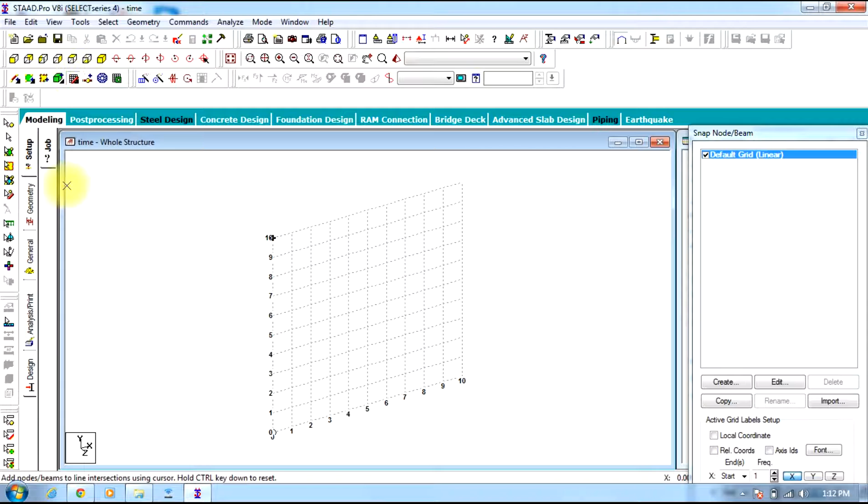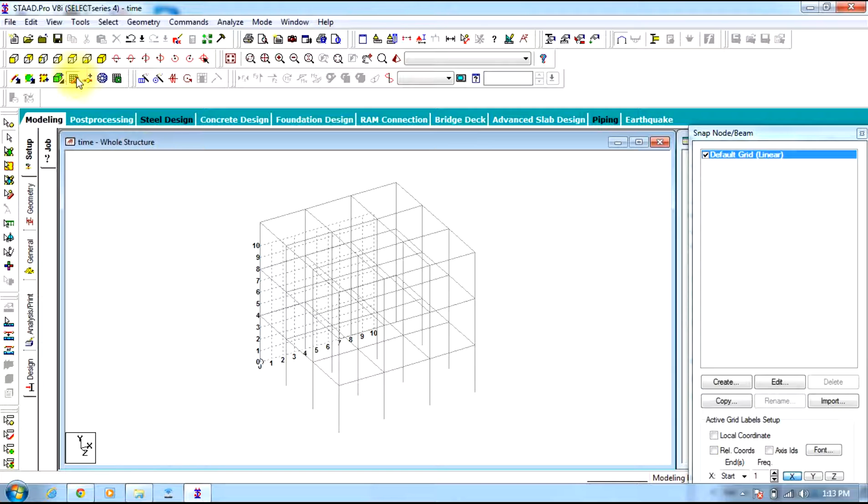Initially we will start STAAD.Pro and select space frame. Then go to Geometry, Run Structural Wizard. Select frame model, select Bay frame, select structure, create a structure, then transfer the structure to the main STAAD.Pro screen. Now you can switch off the grid. Here you can see our structure.

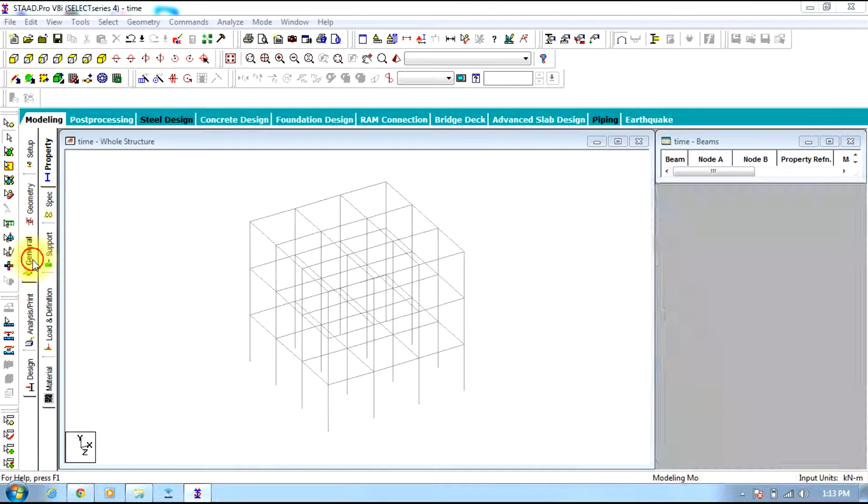We'll be carrying out the time history analysis for this structure. So let us begin. First we will go to General and define a property for the members. Let it be rectangle 0.4 by 0.3, assigned to the entire structure. Then going to supports, create a pinned support.

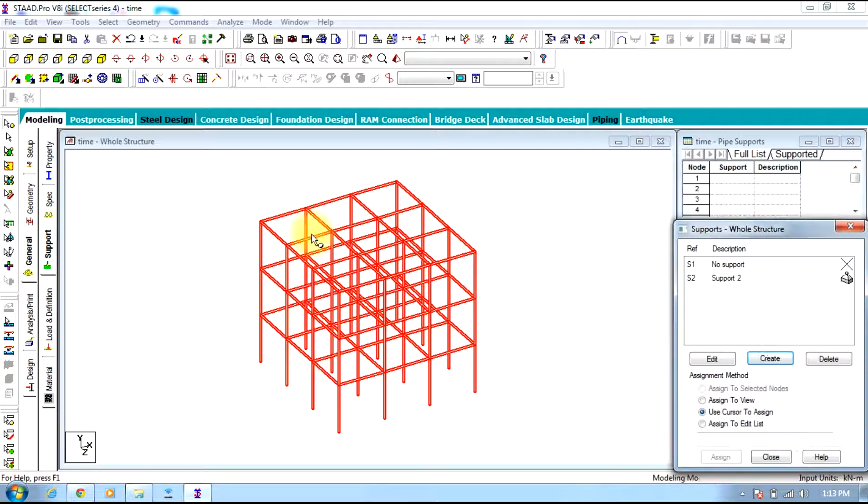Now, the basic information we require for time history analysis is that it is nothing but analysis of a structure over increments of time as a function of acceleration, or maybe force, or moment, or displacement. It is just the analysis of time versus acceleration, time versus force, time versus moment, or time versus displacement.

Or else, it is simply the response of a structure evaluated as a function of time, in simple words.

So in order to begin time history analysis, we have two steps. First is defining the time history analysis definition, then assigning it to the building.

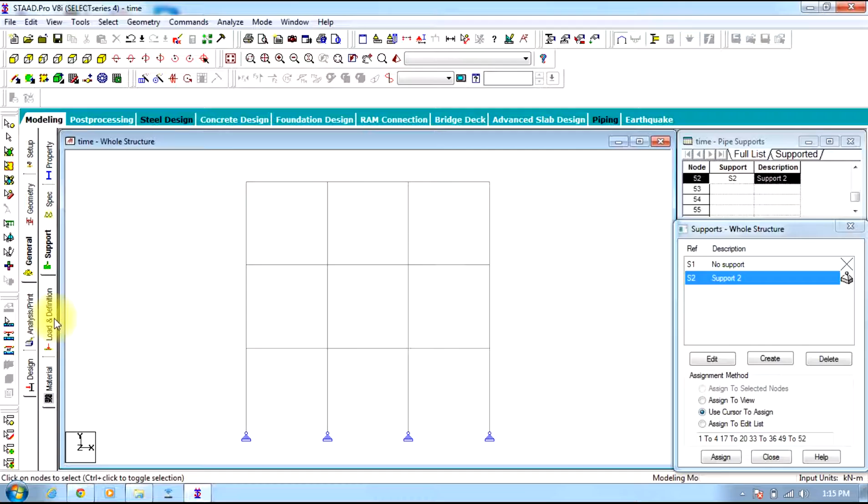Second step will be... So first we will go to Select Loads and Definitions, select Definitions, double click, and select Time History Definition, select Add. A dialog box opens. First let it be type 1.

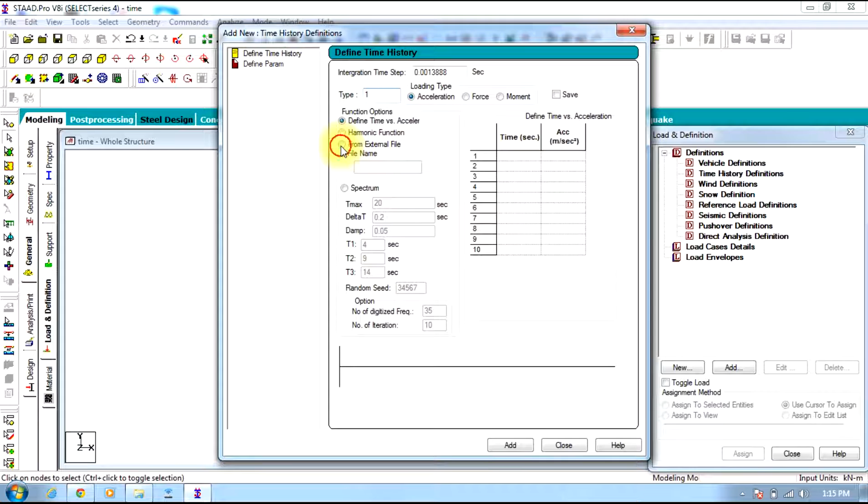Type 1 is simply the starting one, and the loading type let it be acceleration. You can also keep force and moment. Coming to function options, if you have time and acceleration you can provide it, or you can save it from an external file. This external file should be saved in the same directory where this STAAD file is stored.

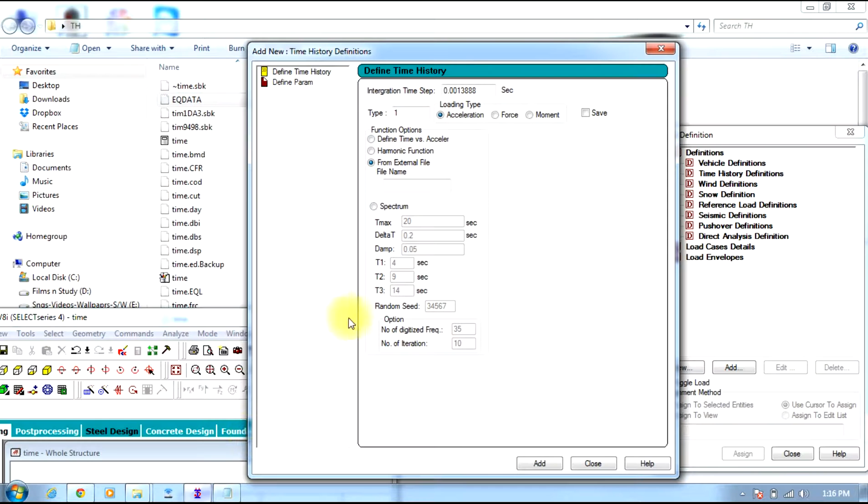So as for me, the time STAAD.Pro file is stored in this folder, and also the external file - you can see it consists of data for time and acceleration. It is also stored in the same folder. It is eqdata.txt. We will just note it down here: eqdata.txt.

Now you select this Save button. Now select Add, then go to Define Param.

Time step, in simple words, is the time increment used for analysis, and arrival time is the time at which the assignment of load begins. It can be positive, negative, or 0, and it begins at time 0 by default.

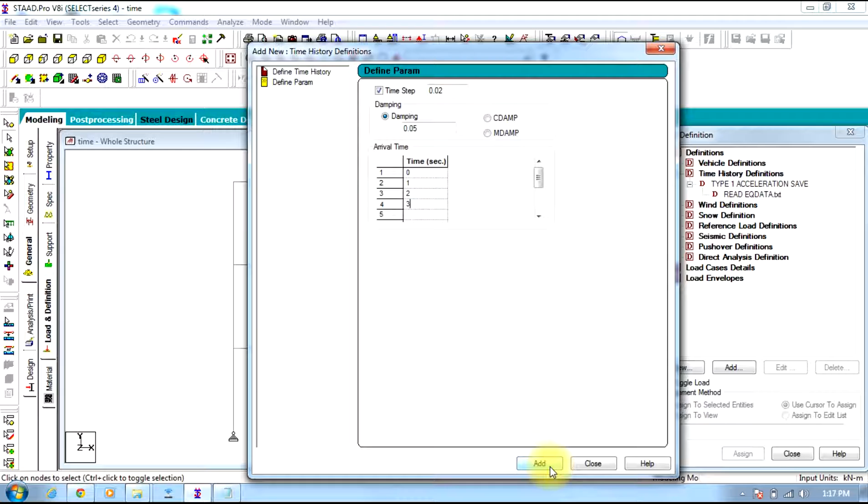So we'll give time step as 0.02, meaning the time history analysis will be in increments of 0.02 seconds, and arrival time for 0, 1, 2 and 3 seconds is given, at where the load assignment begins. Select Add. Now close it. So we have done with the first step of defining the time history definition.

Next, going to load case details. First select dead load, select self weight - loading type will be dead. Second one will be dead load, floor load or slab load - loading type will be dead. Third one will be dynamic load, and loading type will be seismic.

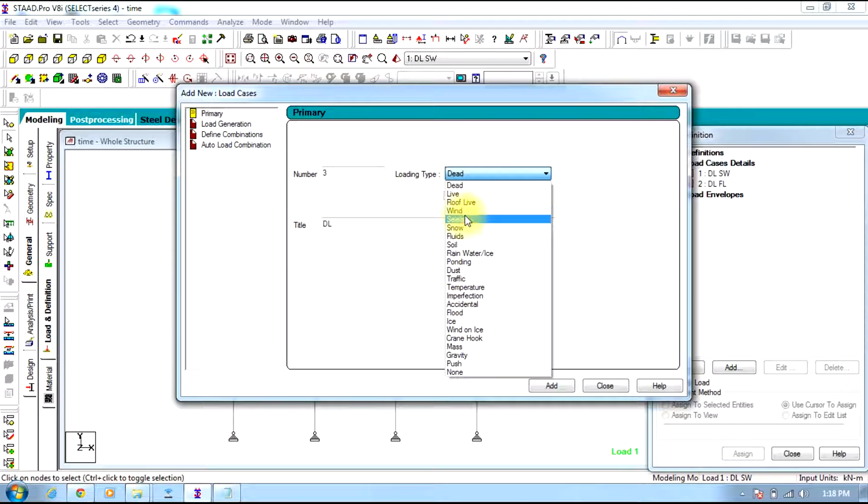Select Add. Now going to dead load self weight, select Add, give self weight in the Y direction. Select self weight, assign it to the view, meaning the whole structure.

Next, going to dead load floor weight, select Add, give floor load which will be minus 12 kN per meter square in the range of 0 to 12 meters in the Y direction. Select Add, and you can see it.

Then going to dynamic load, just to avoid confusion, you can note it down.

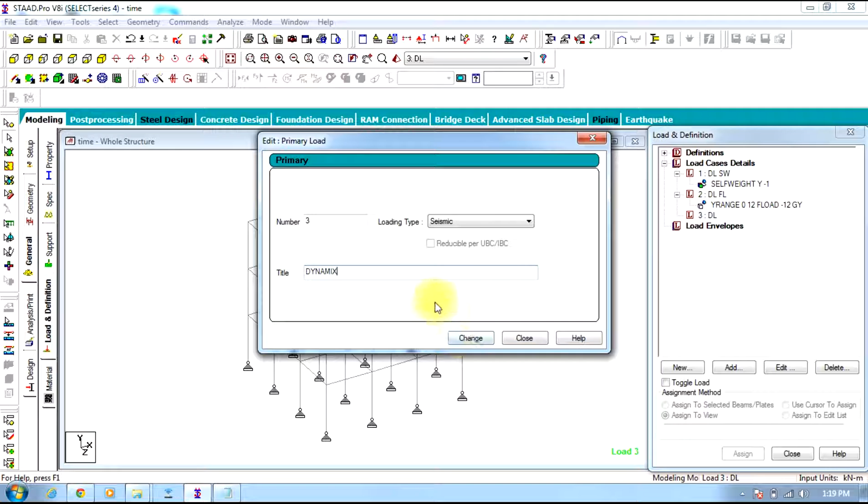Now select dynamic load, select Add. First we will be giving self weight in all three directions, and it should be +1. Factor should be +1, and the load should be the same in all three directions.

We have also provided floor load of 12 kN per meter square in the range of 0 to 12 meters in all three directions: global X direction, global Y direction, and global Z direction.

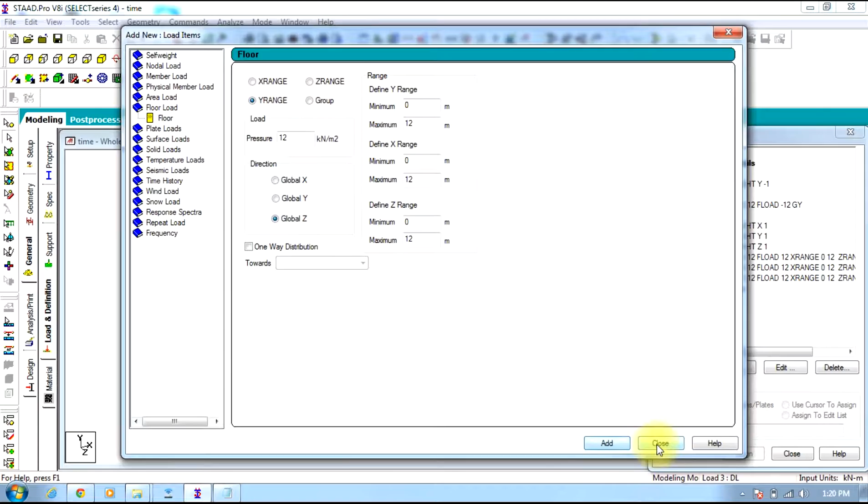Now assign the self weight to the view or the building. Now you can see the load being assigned.

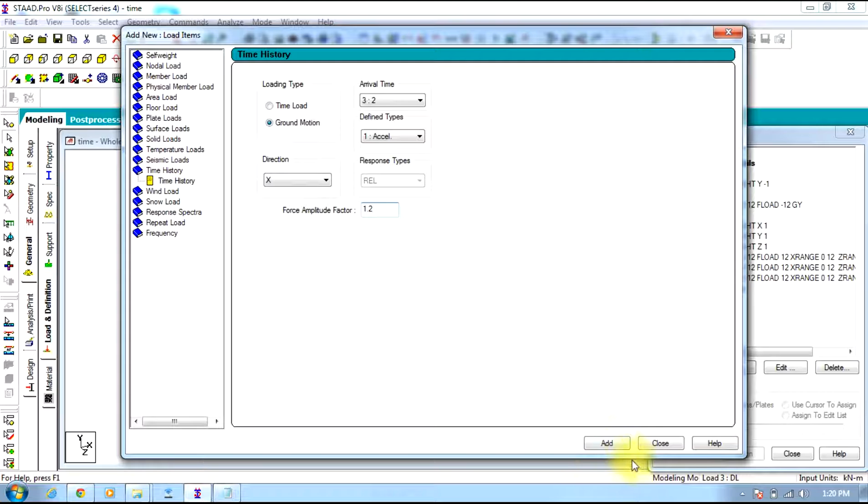So now select dynamic, select Add, go to Time History Load, select Ground Motion. You will select arrival time as 2 seconds. Defined type will be acceleration, and direction is given as X. Amplitude factor you can keep as 1.2 or 1.5, or else you can give 2. Select Add, close.

Now you have done with the second step of defining the time history to the building - assigning time history loads to the building.

Now you go to Analysis and Print, select mode shapes or no print. Select.

The one thing you need to do before all this is provide mode shapes by going to Commands, Miscellaneous, Cut Off Mode Shape, keeping to default 6, but we'd like to have 25 or 30 mode shapes. Select OK.

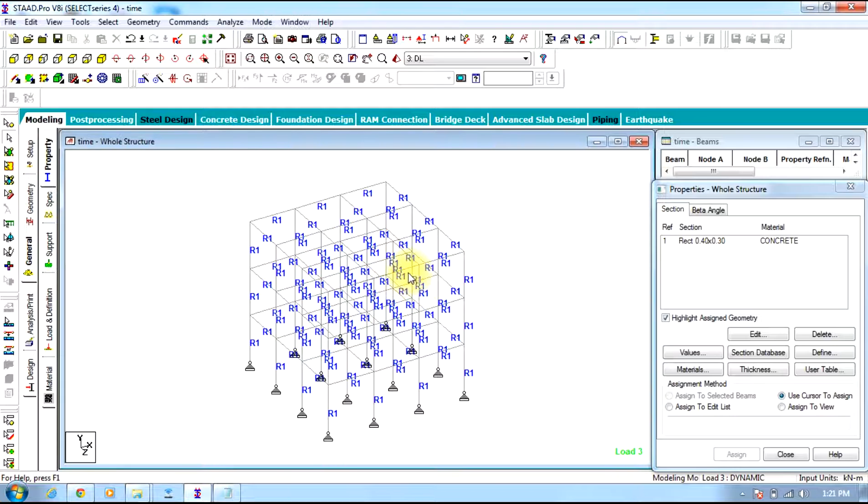Now we can go to Analysis, select mode shapes, select Add.

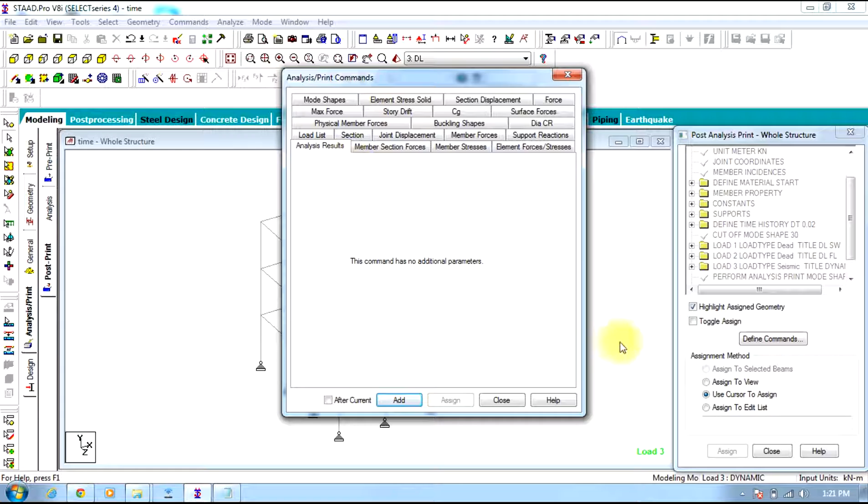Now going to Post Print, you will define command Analysis and Results. That would be sufficient. You can even add mode shapes. Now analyze the structure.

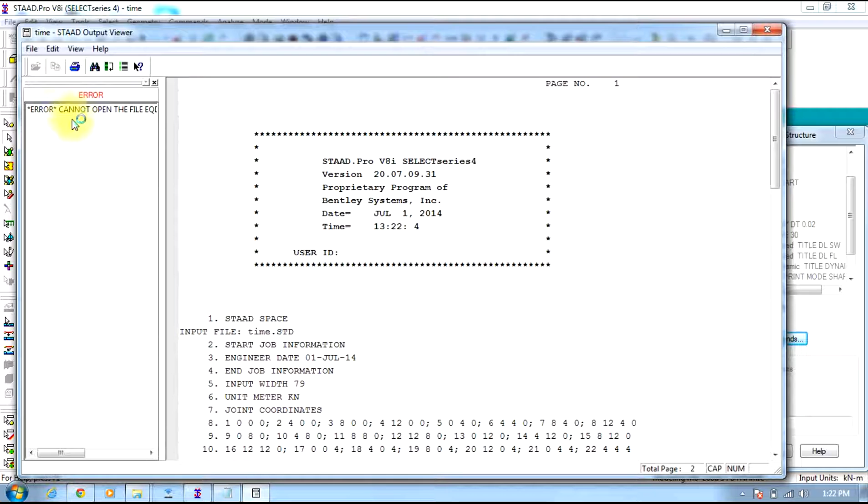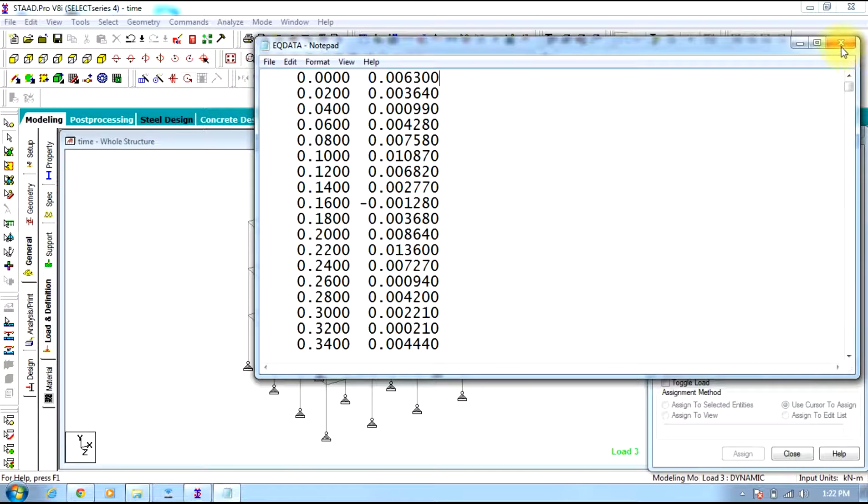So you can see I have made a simple mistake. I need to take care of all those. Yeah, this was open, so just close it. Now run the analysis and let us see if it works.

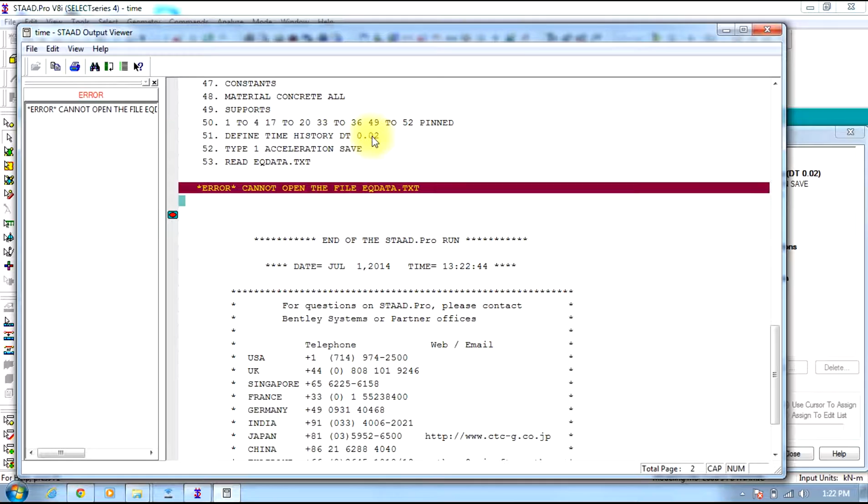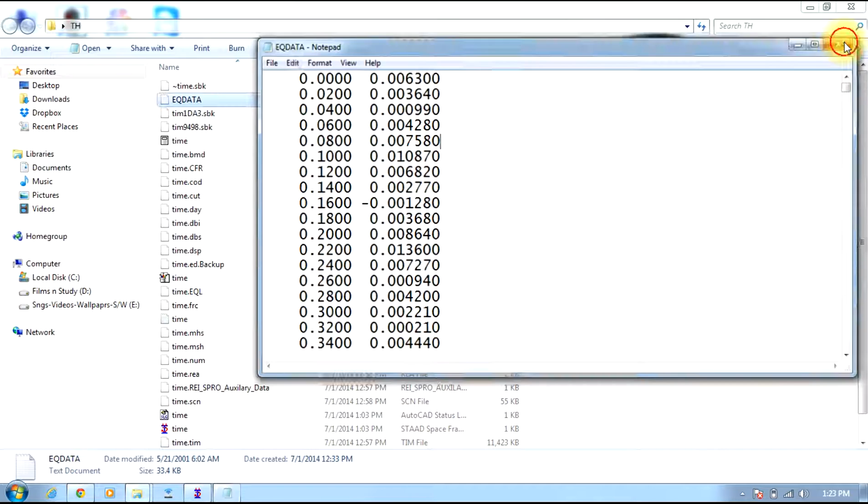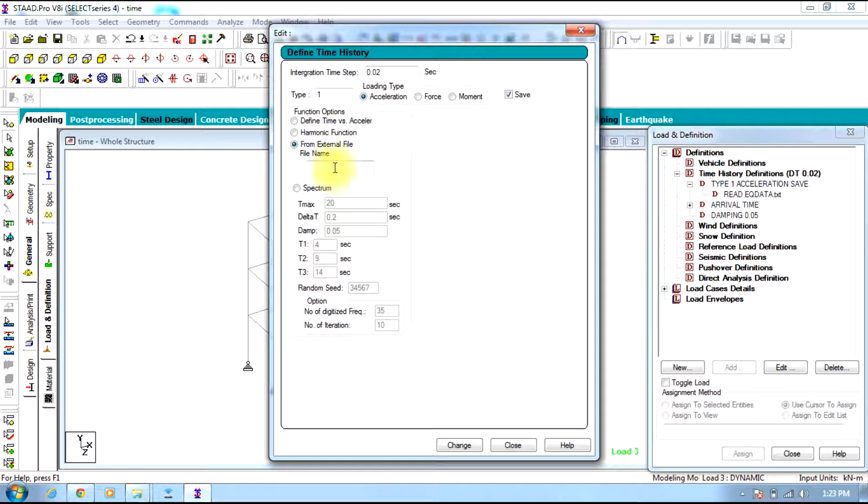Well, everything is fine. Then where is the mistake occurring? Okay, so this might not be it. Actually, this should be it.

Let us open that file and see what it contains. Actually, it is another file.

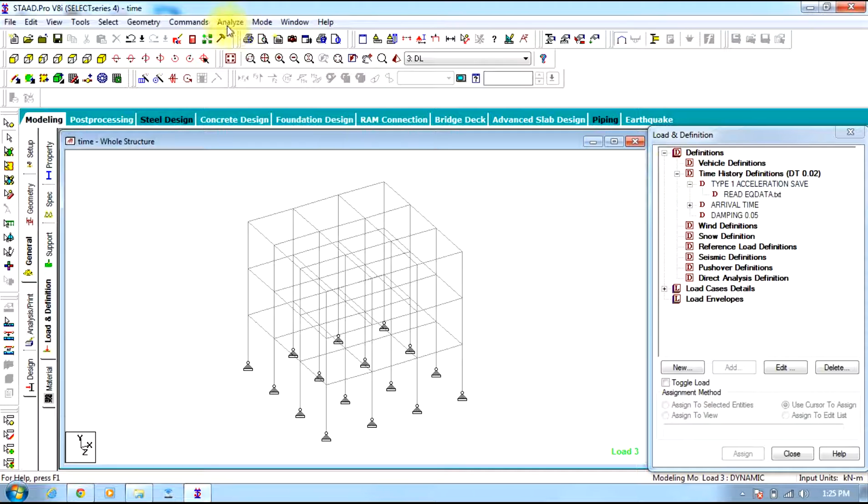So we'll copy this file and go to the folder where the STAAD.Pro files are located or present, and paste it here. Now run the analysis and see if it runs or not. Yes, it runs. Actually, the file was in that folder but not in this one. So you need to take care of that to avoid miscalculations and errors.

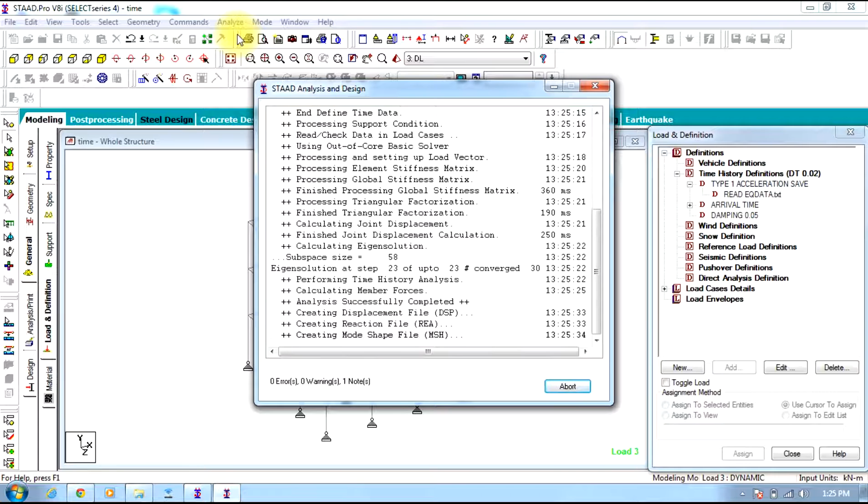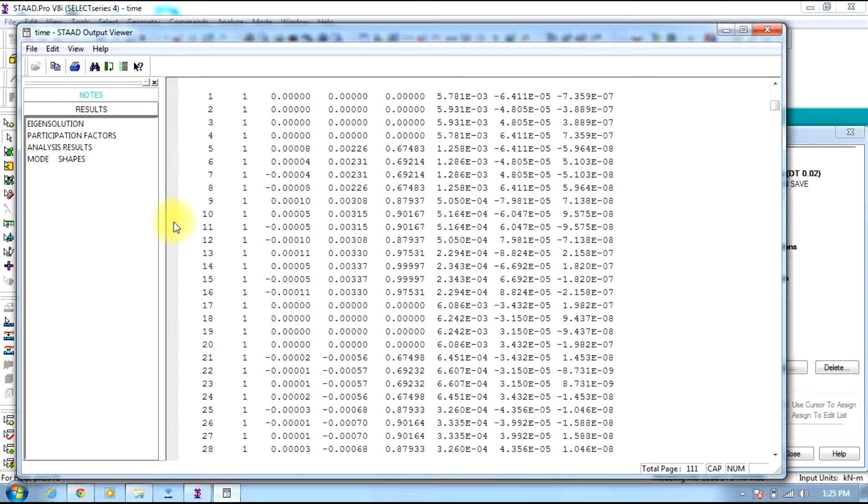Well, you can see the mode shapes are also provided. Coming to participation factors, easily 90% is achieved in the first few mode shapes.

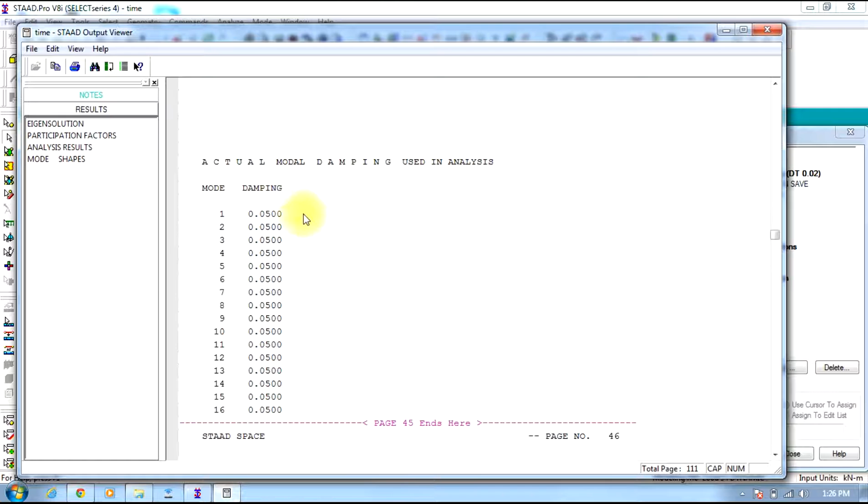You can see modal damping used in analysis is 0.05. Coming to here, time step used in history analysis is, as we took, 0.02 seconds, and the number of modes considered is 30. Time duration was 34.16 seconds, and the number of time steps were 1708. So you can see maximum base shear in x direction, y direction, and z direction occurs at the time provided.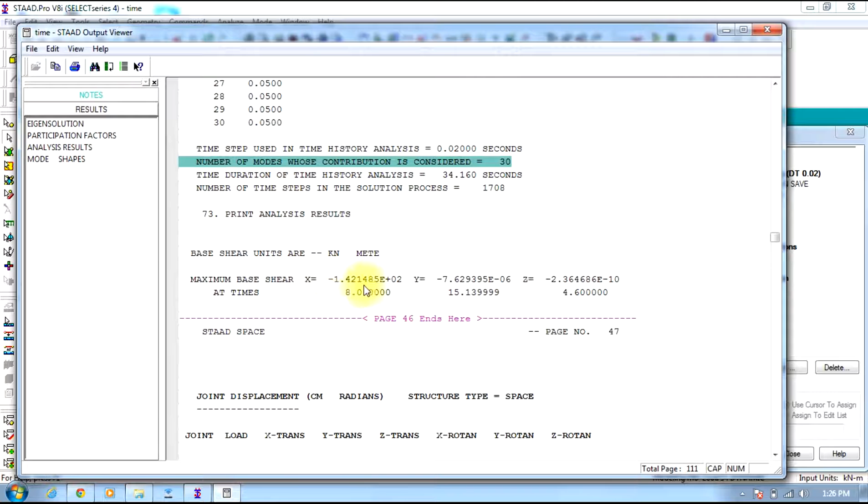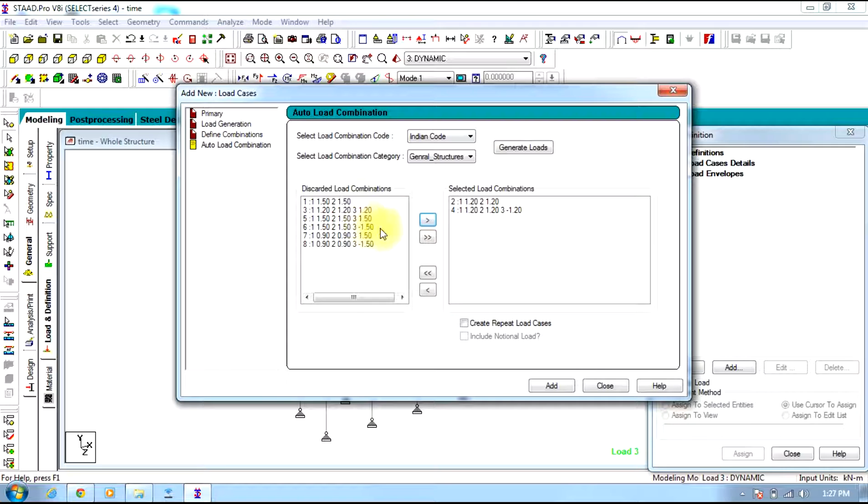Well, in this way we observe the results. Now going to post processing. Okay, do one thing: create a few combinations. That would suffice. Select add.

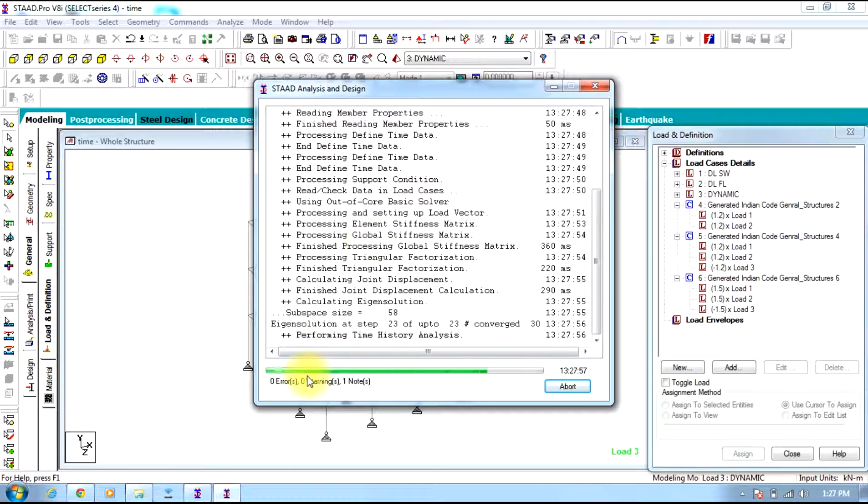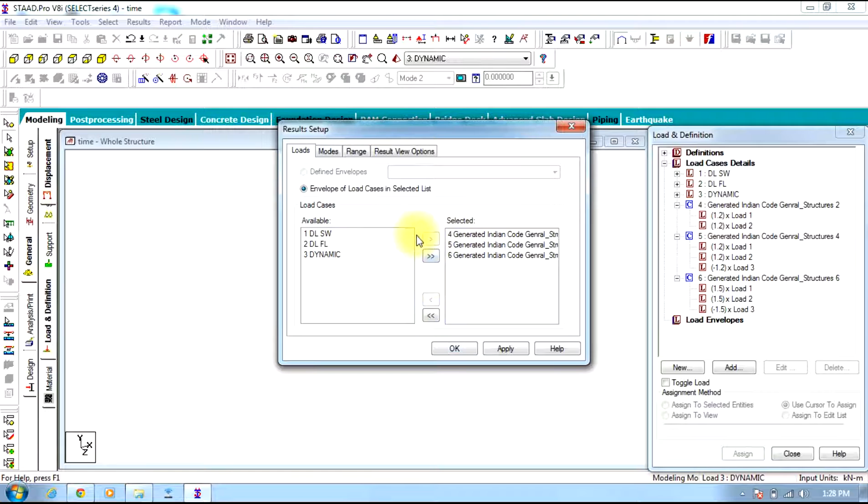Now analyze the structure once again. As you have observed the output file, we will go to post processing directly. In post processing, we'll consider the three combinations, removing the nodes and loads. Only the three combinations selected will be considered. Select OK.

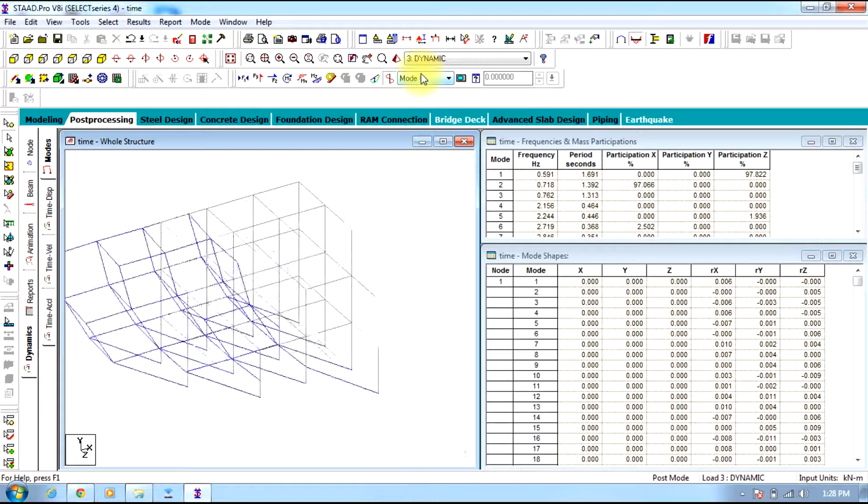Now going to dynamics, you can see the modes and the different mode shapes occurring for different types of modes. Their particular details are given here.

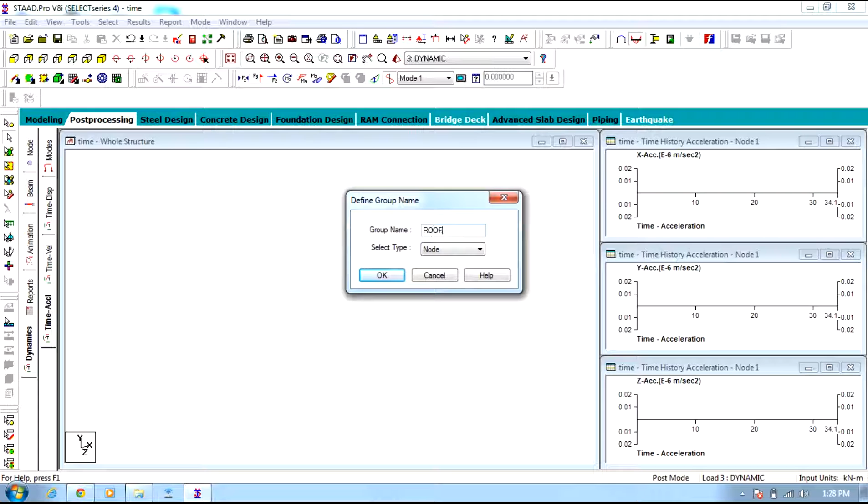Then going to the time acceleration tab, it asks you to create a node group. Select yes, and select the node group as roof. We will be considering roof nodes. Select OK.

Now select the nodes. Select the roof nodes carefully. Or else you can select front view and select the roof nodes easily.

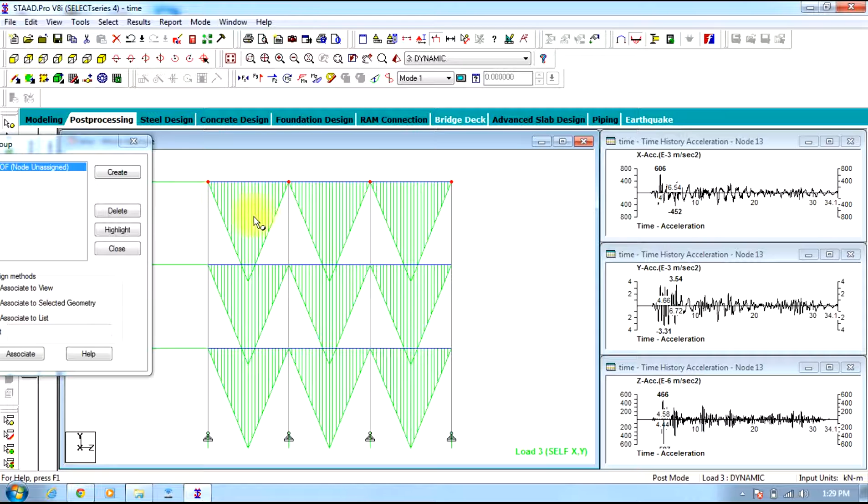Then going to other view, so all the nodes are selected. Now select associate. Okay, now you have selected. Now close it. Well, now select the particular node. You can select even other nodes and it gets created.

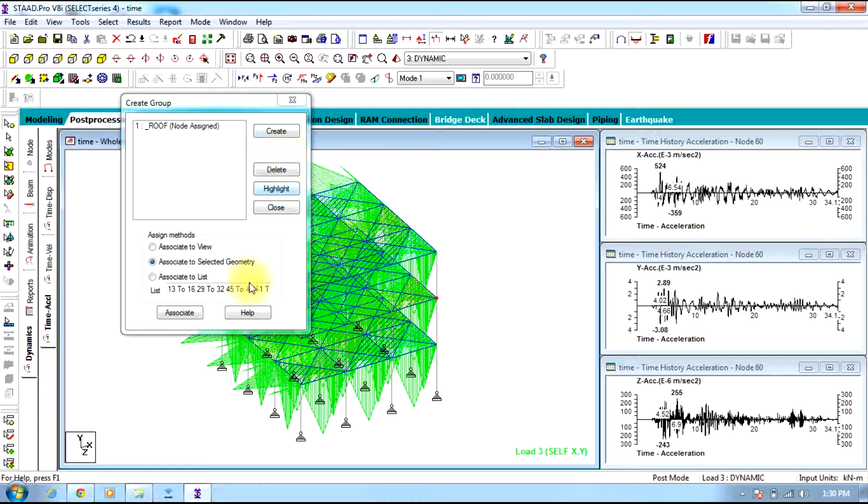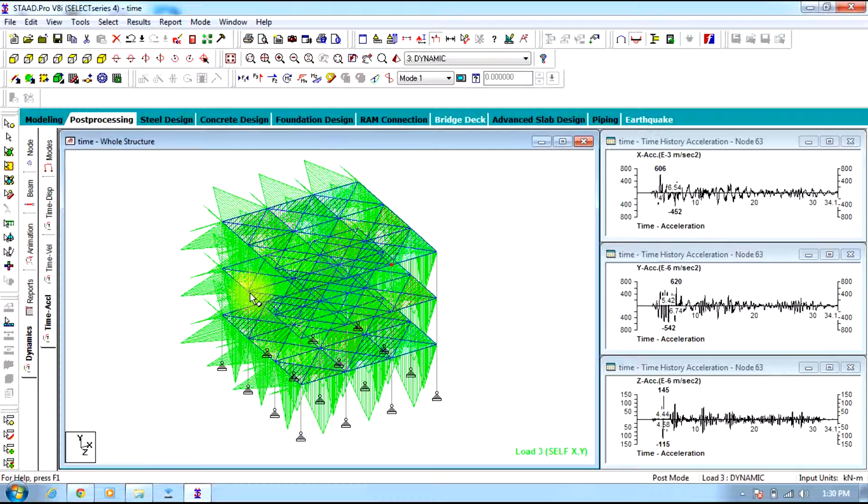So as you can see, this is node 56, and the graph is shown for acceleration versus time. You can see this here for node 64, node 63, and node 25.

Now going to time displacement, you can select the node and observe the time displacements. Well, you select the deflections.

Well, you cannot view it since the scale would be very small, so you just go to results, select scale, and decrease the scale.

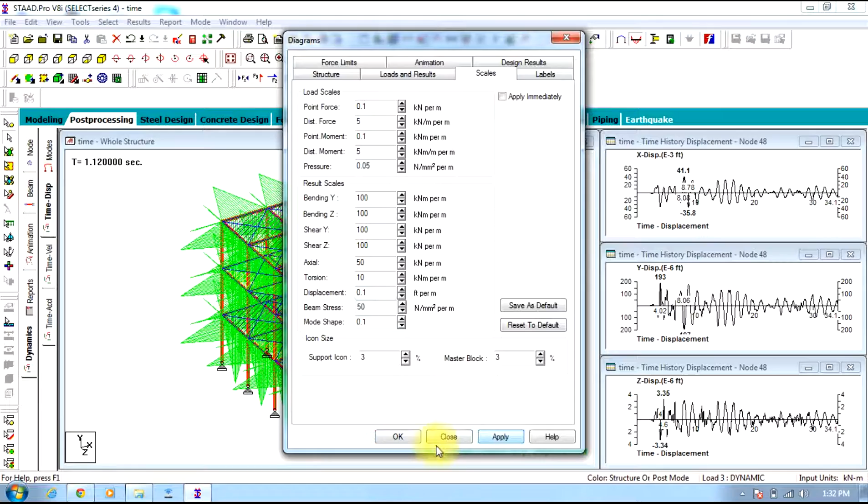Select the structure, go to scales, decrease the scale, select apply. Okay, well, here it is a little difficult, however.

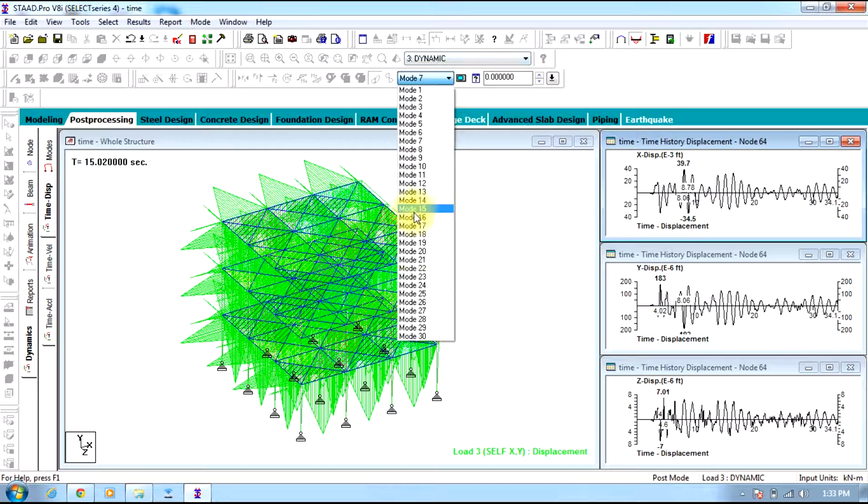For that particular node you selected, you can see the deflection at different times, and for different load combinations too. For different modes also, as you can see here, the deflection occurring.

Let us see by going to results, selecting scale, decreasing it, if anything happens. So you can see for mode 28, however, the deflection can be observed in that way.

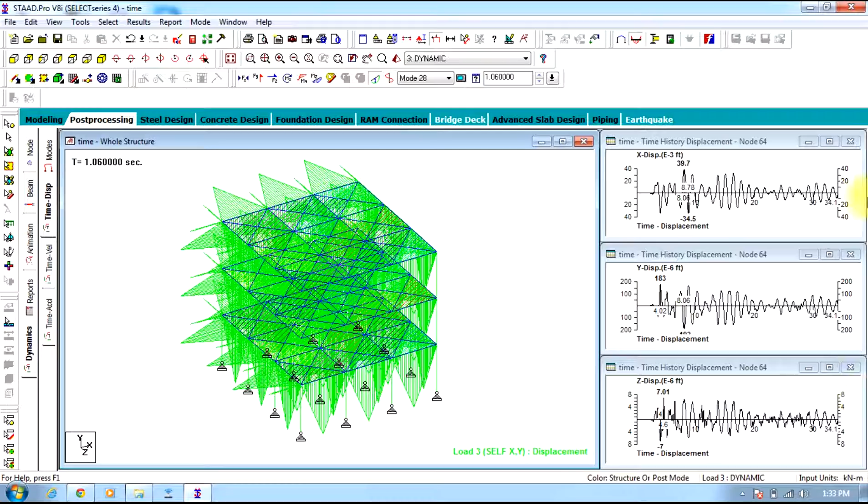So in this way the time history analysis is carried out for a structure, and this would be the end of the session.

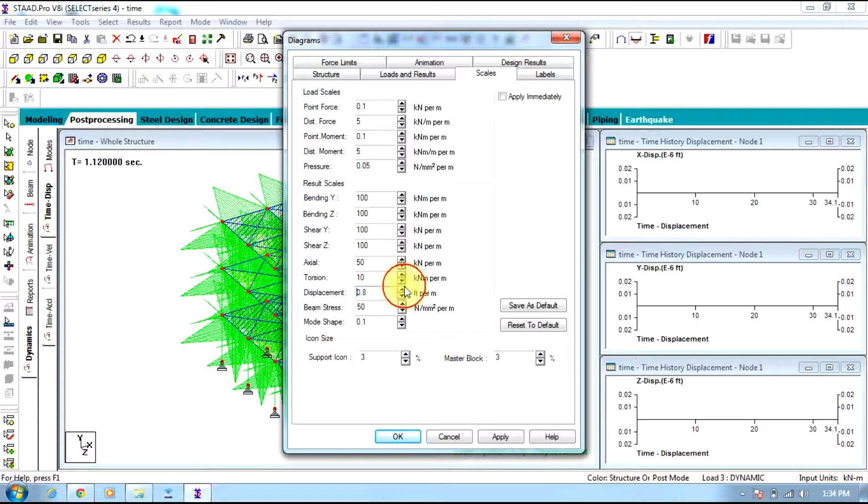However, just a second, hang on.

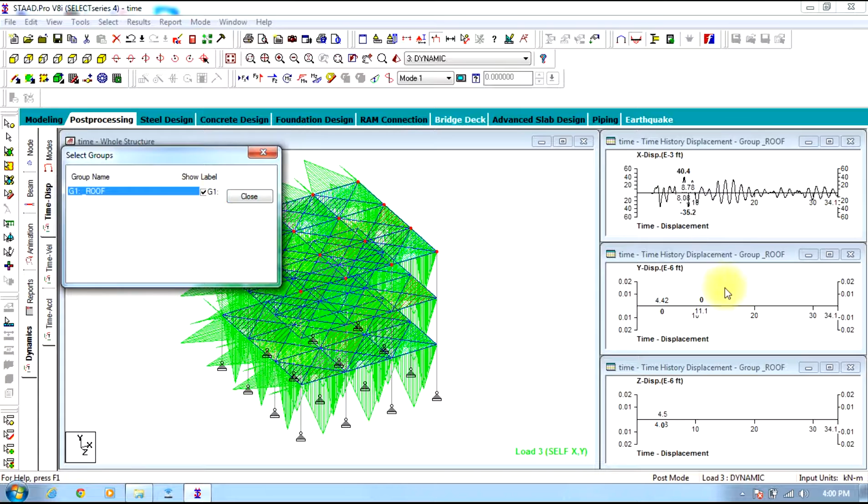So if you go to time acceleration, just a second, go to time displacement, select for roof, an average of 40.4 of all those nodes is given. The displacement is 40.4 in feet.

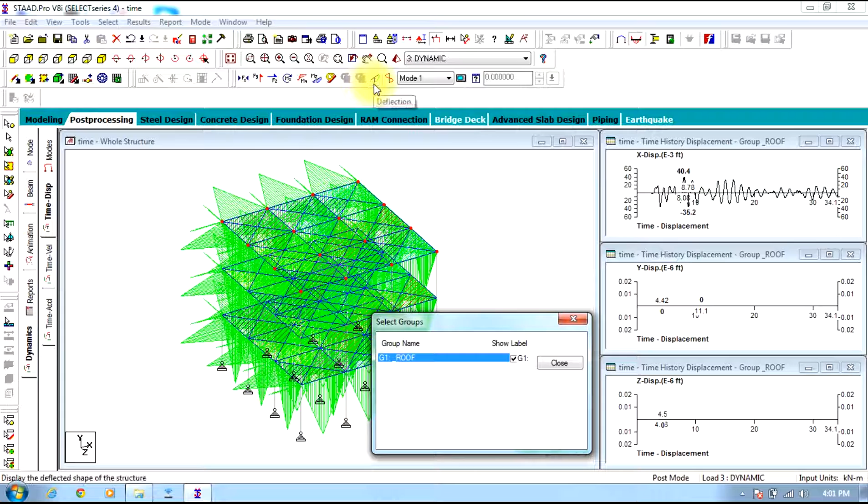So if we want to see the displacement, you select the deflection tab and go to results, select scale, decrease the displacement. If it is in feet, decrease it to such a level, to so much small, and select apply. If it is in meters, 0.07 would be sufficient.

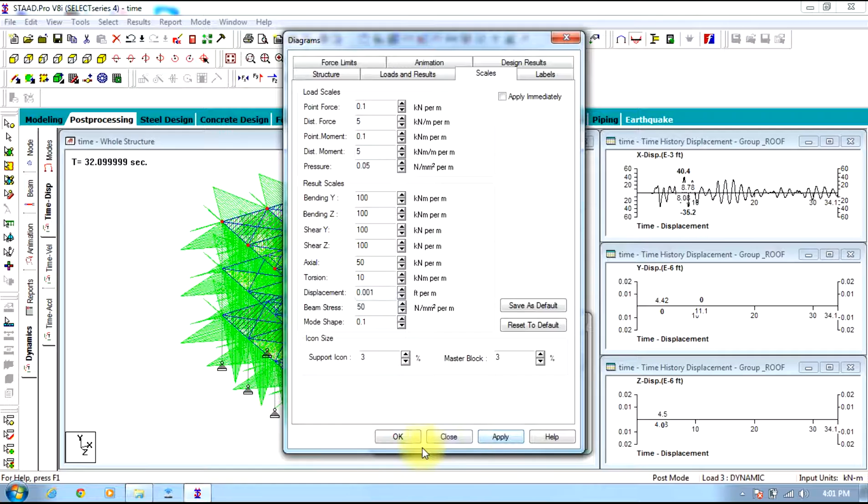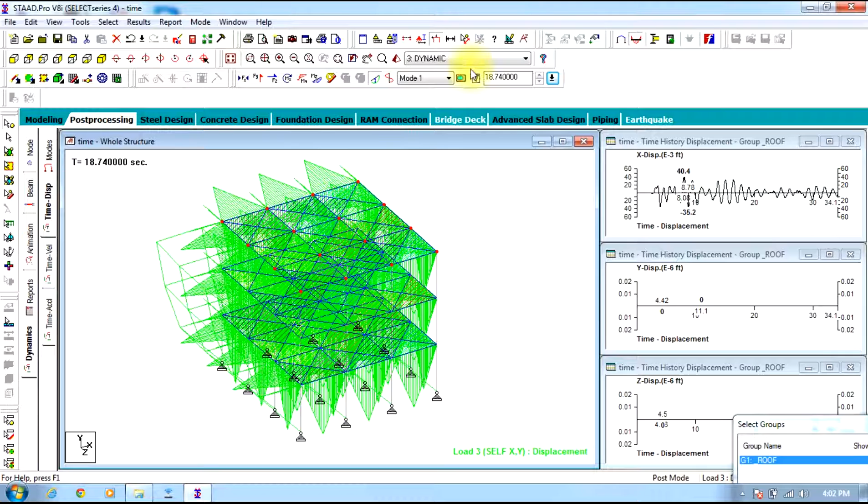Okay, now using this button, you can see the deflection occurring at different times, and also for different modes.

So in this way time history analysis is carried out. Thank you, this is the end of the session.